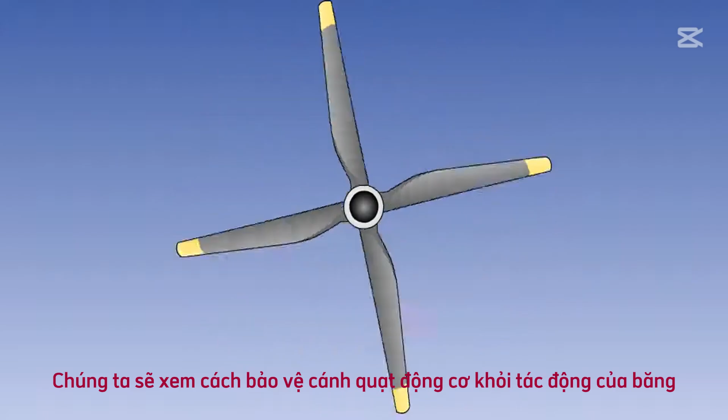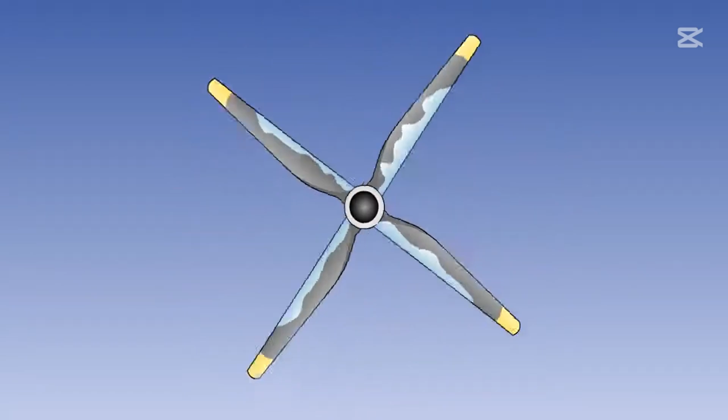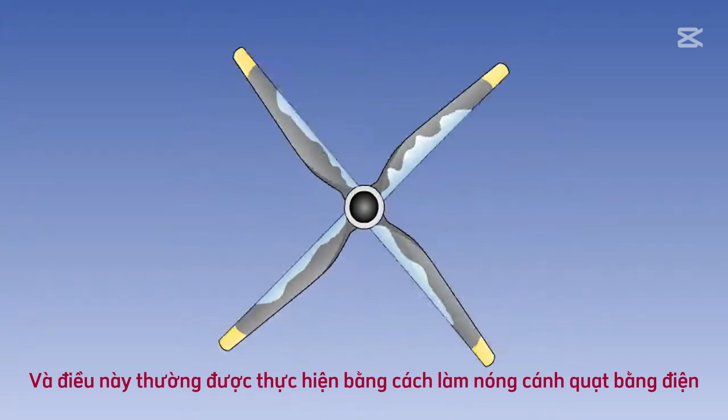Ice formation on a propeller blade produces distortion to the aerofoil section, causing a loss in efficiency and possibly causing unbalance, which can lead to destructive vibration. The build-up of ice must be prevented, and this is usually done by electrically heating the propeller blades.

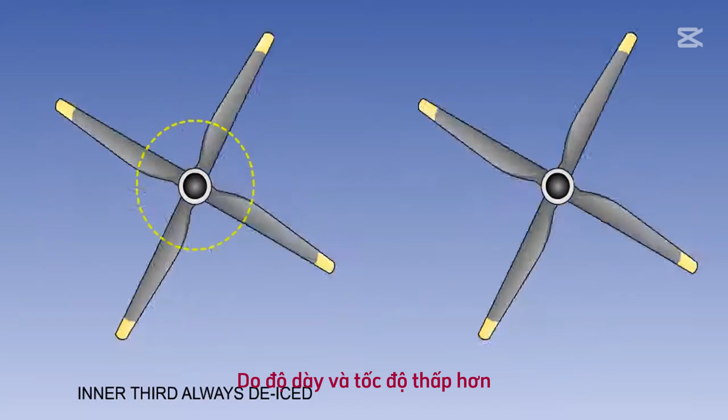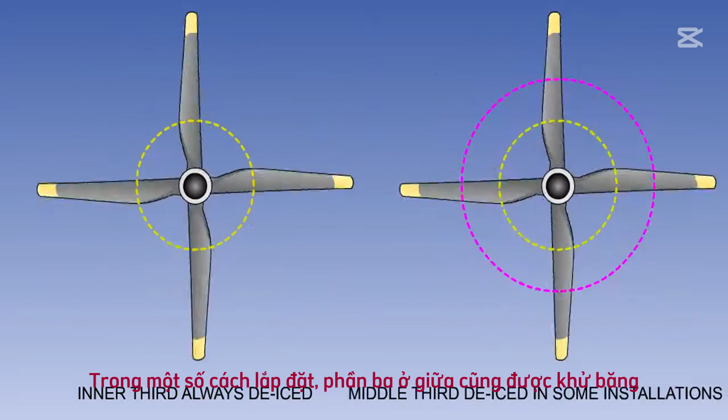Because of its thickness and lower speed, the inner third of the propeller blade is most susceptible to icing, and is always de-iced. In some installations, the middle third is also de-iced. The outer third of the blade is not so susceptible to icing, and is not normally de-iced.

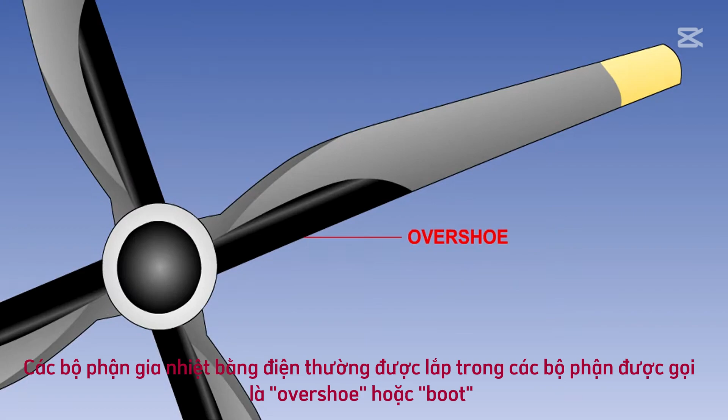The electrical heating elements are usually fitted in components known as overshoes or boots. The construction of the overshoes varies between propeller types.

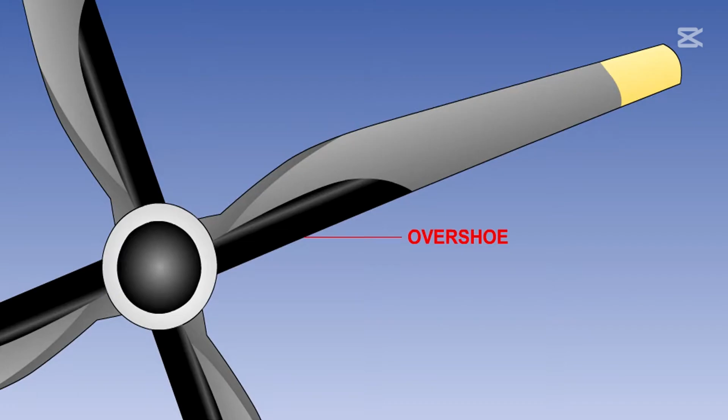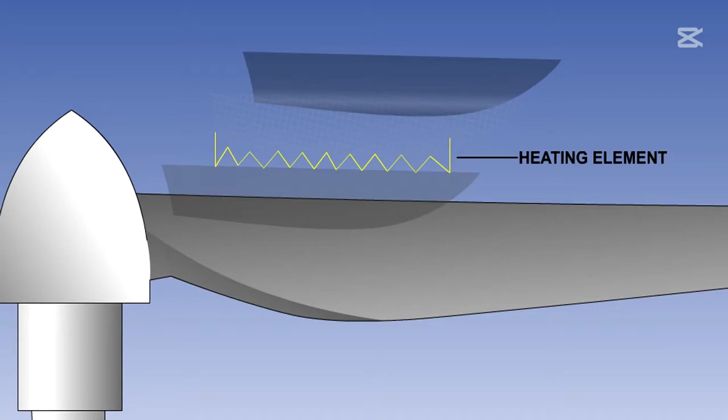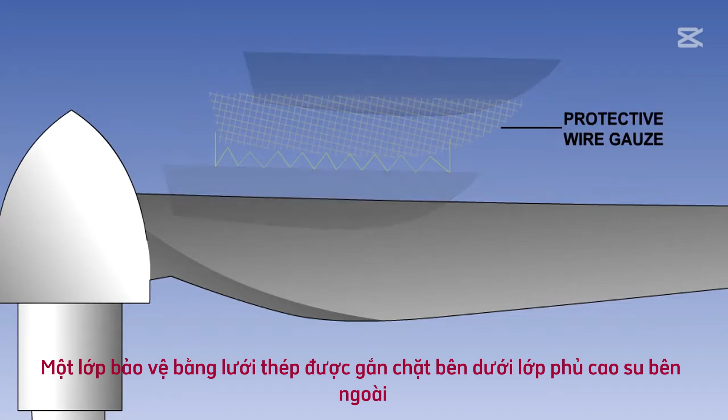In a common installation, the heating element wires are interwoven with glass threads, which form a glass cloth base, which is cemented between sheets of rubber. A protective guard of wire gauze is cemented beneath the outer rubber covering. The overshoe is shaped to fit around the blade leading edge and is cemented to it.

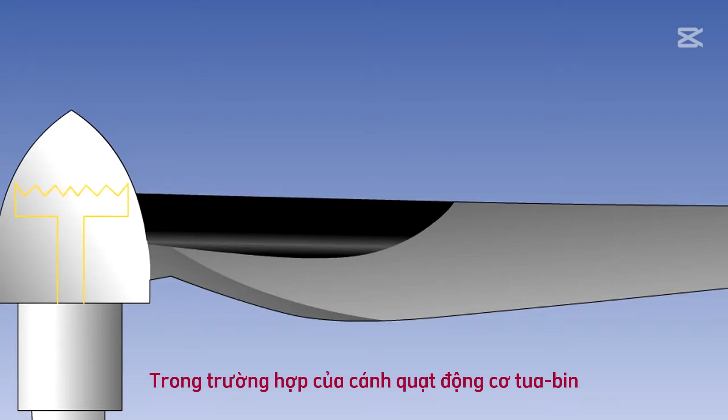In the case of turbine engine propellers, the cover over the pitch change mechanism, or the spinner as it is known, may also have electrical heating elements embedded in it.

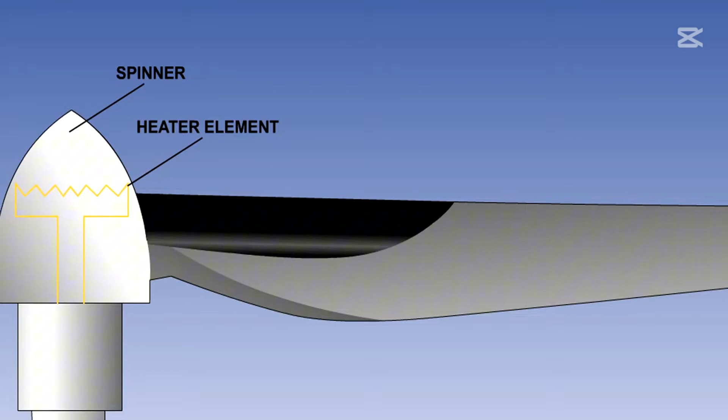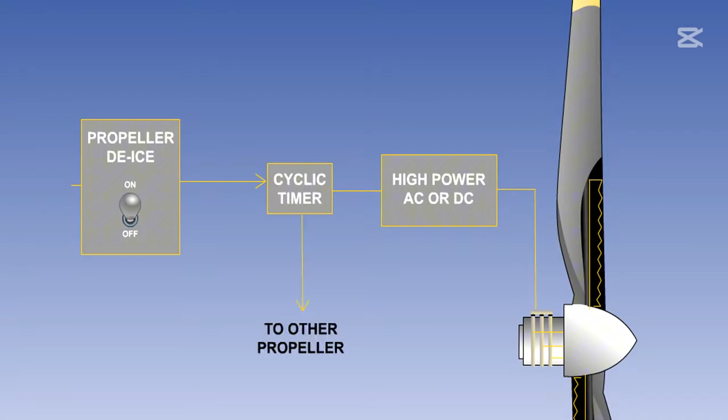Depending on the type of aircraft, the electrical power for heating the elements is either direct or alternating current. These systems consume a relatively high amount of electrical power. However, they are controlled by employing a cyclic timer, which will de-ice the propeller blades of one engine at a time, thus reducing the power requirement.

In some installations, a power relay is fitted in the engine nacelle. It allows the length of heavy high current wiring to be kept to a minimum, with light cable being used in the control circuit.

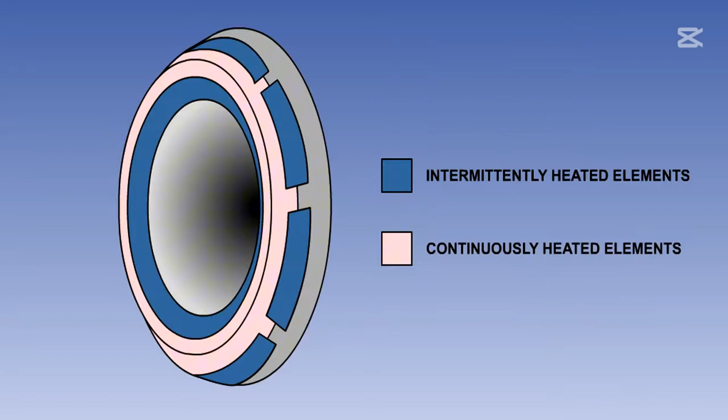In turbo propeller engine installations, the propeller heating circuit may form part of a power unit de-icing and anti-icing system, with the cyclic control being integrated with the engine air intake heating circuit.

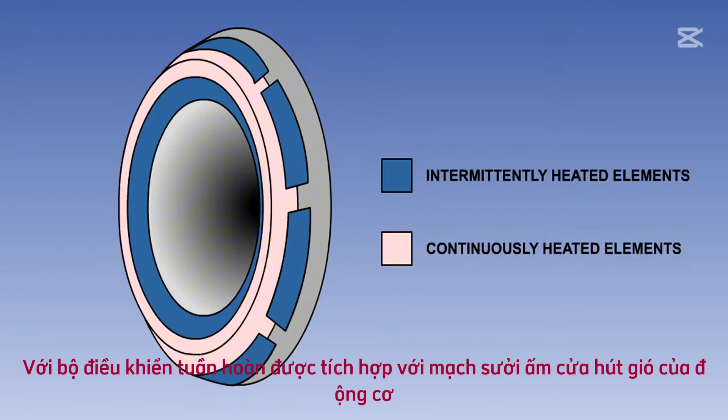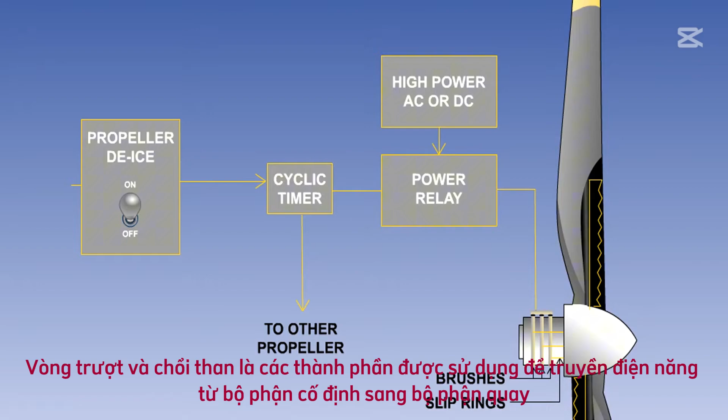The power required for heating is conveyed to the elements via cables, slip rings, and by brushes, contained within a brush block housing. Slip rings and brushes are components used to transfer electrical power from a stationary part to a rotating one. They are fully explained in the Electric System series of lessons.

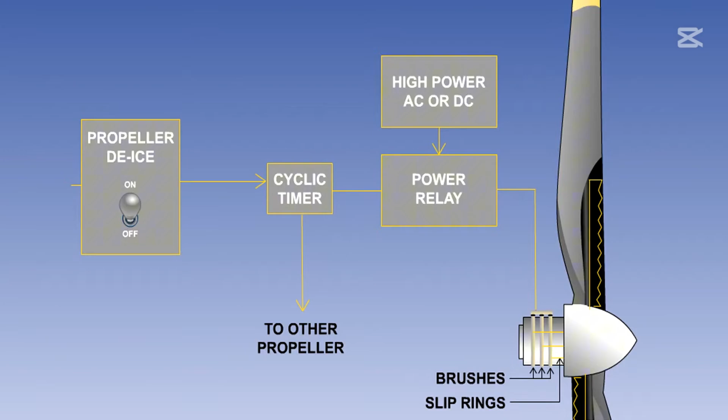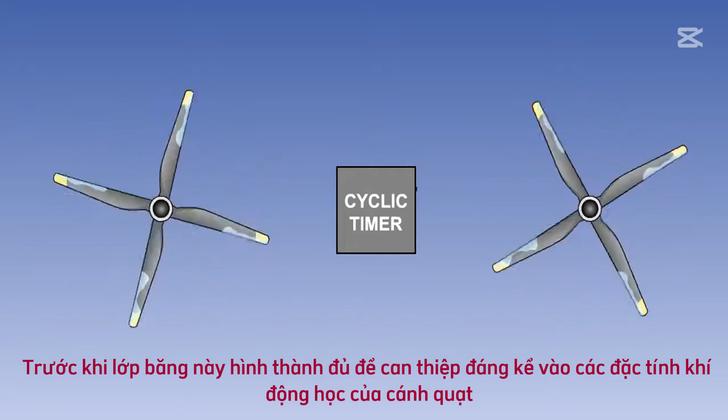In icing conditions, during the unheated period, a thin film of ice will build up on the leading edges of the propeller blades. Before this film builds up sufficiently to interfere appreciably with the aerodynamic characteristics of the blades, the cyclic control applies heating power.

The ice in contact with the blade surfaces melts, breaking the bond between the ice and propeller blade. The remaining ice is then carried away under the action of centrifugal and aerodynamic forces.

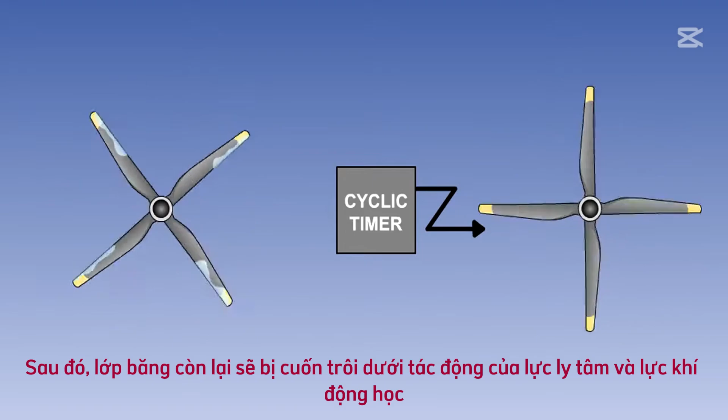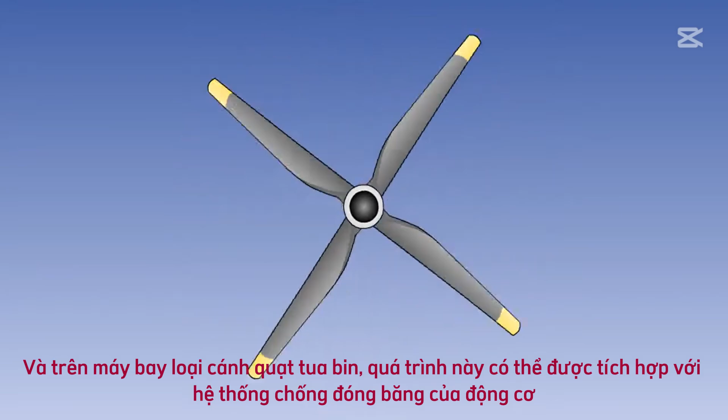That is the end of the lesson on propeller ice protection. You should now know that electrical propeller de-icing is usually done cyclically, and that on turbo propeller type aircraft it may be integrated with the engine ice protection system.